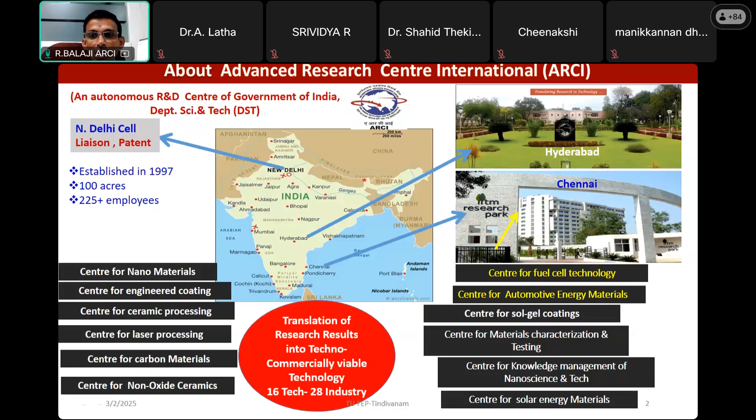So far we have transferred about 16 technologies to 28 industries in various aspects. Coming to our center, which was established in 2004, with a major focus on hydrogen fuel cells, that means hydrogen utilization aspects. Apart from that, we also concentrate on hydrogen generation R&D activities and storage.

Apart from three main activities, we also work on other energy storage devices like battery or supercapacitor, which are kind of spin-off technology, because most of the components used for fuel cell generation and storage aspects can also be used in making other energy storage devices like batteries or supercapacitors. We do concentrate on that particular area also.

Ultimately, we also have a kind of manpower generation program, hiring JRF and SRF for our R&D activities. A major advantage is that they can join with us with or without GATE category. Once they join with us, we will support them for 5 years with full stipend, and they have the liberty to register for a PhD at any of the NITs or IITs in India. We support them for 5 years as an external candidate, and at the end, they will have a PhD degree from the NIT or IIT where they registered, along with good exposure to high technological readiness level R&D activities. That is also one of the verticals we work on - generation of skilled manpower for this hydrogen energy society.

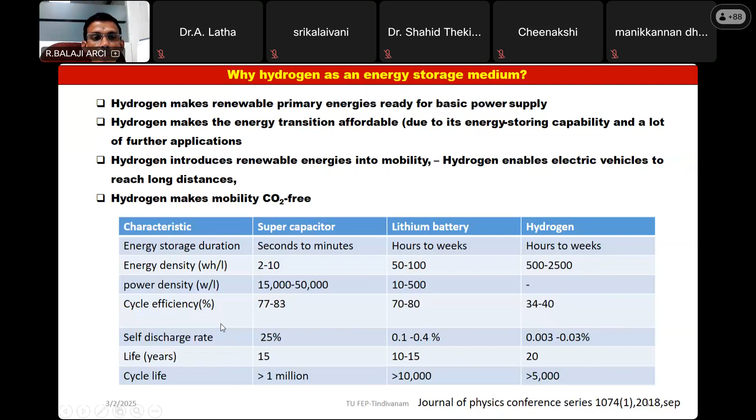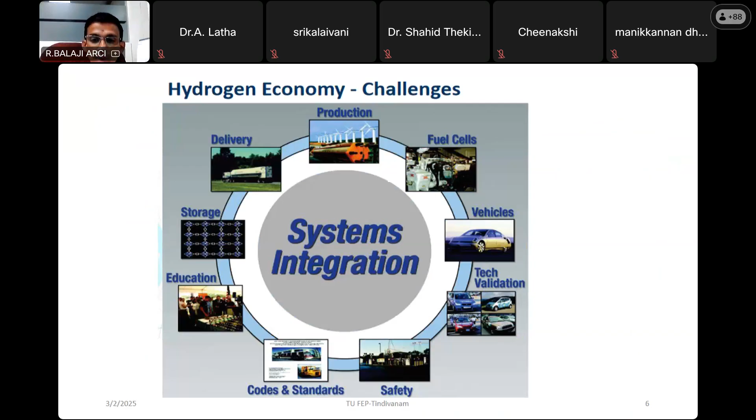When you talk about hydrogen, there are other key aspects I discussed: generation, storage, and transportation. Finally it comes to utilization. Apart from these four important steps, there are many intermediate steps we need to take care of, especially arriving at standards, safety, and codes, which are equally important because hydrogen is a highly explosive gas that needs proper codes and safety standards, unless otherwise it will not be practically viable. So the development of codes, safety, and standards is also equally important. And skill and education on energy technology is also equally important. These are the various verticals we need to take care of when using hydrogen energy based mobility or backup power applications, especially for smart cities.

As I said, the first step is generation, which is classified based on the amount of CO2 emitted from the feedstock while generating hydrogen. In that case, there is brown hydrogen, which has a huge CO2 emission per kg of hydrogen, coming around 18 to 20 kg of CO2 per kg of hydrogen.

In terms of gray hydrogen, it is slightly lower than brown hydrogen because the feedstock is natural gas, where we have a single carbon molecule. So the emission of CO2 is controlled and lower than brown hydrogen, lying between 10 to 12 kg per kg of hydrogen.

The same hydrogen, if you have a proper mechanism for carbon capture and sequestration, is colored as blue hydrogen. And ultimately, if you generate hydrogen from water using renewable energy, it is green hydrogen, which has zero carbon footprint, with emission of CO2 almost zero while producing per kg of hydrogen. This is the major classification of hydrogen generation, without which we can't go for any application of hydrogen.

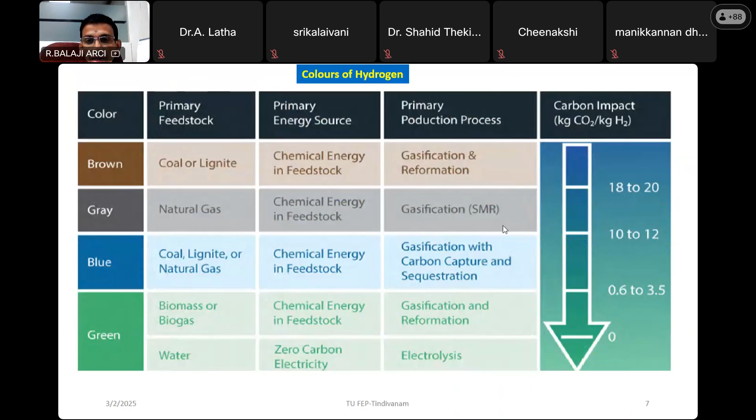As I said, when you generate hydrogen from hydrocarbon, we will end up with carbon monoxide and carbon dioxide, and we need a proper carbon capture mechanism. Unless otherwise, the real advantage of hydrogen energy may not be appreciable. But if you get hydrogen from water as the source, you end up with hydrogen and oxygen, which are environmentally harmless. So you can get pure hydrogen through water using renewable energy.

Here, you cannot consider grid power for electrolysis or any purpose; you have to consider renewable energy power. Using renewable energy power, you can split the water molecule and get hydrogen. This is a well established process called electrolysis, which is well established and demonstrated.

Whereas in the case of thermolysis, it is nothing but getting heat from renewable energy, and using that heat, water is directly split into hydrogen and oxygen. The disadvantage here is that during the thermolysis process, the possible recombination of hydrogen and oxygen which is produced is more likely. So the chances of recombination are more, and that technology is not highly mature.

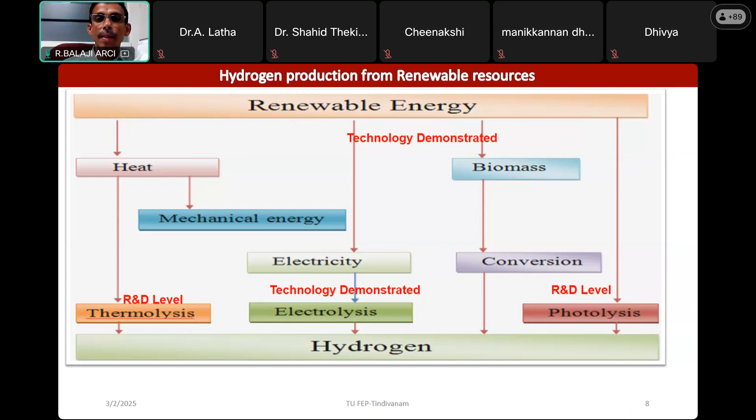In this electrolysis process, when you use water as the source for hydrogen, you have to give electrical energy. Theoretically, we require about 35 units of electricity to produce 1 kg of hydrogen. But practically, because of material limitations, cell resistance and component resistance, the energy requirement per kg of hydrogen production is almost double - close to 50 to 60 units of electricity per kg of hydrogen.

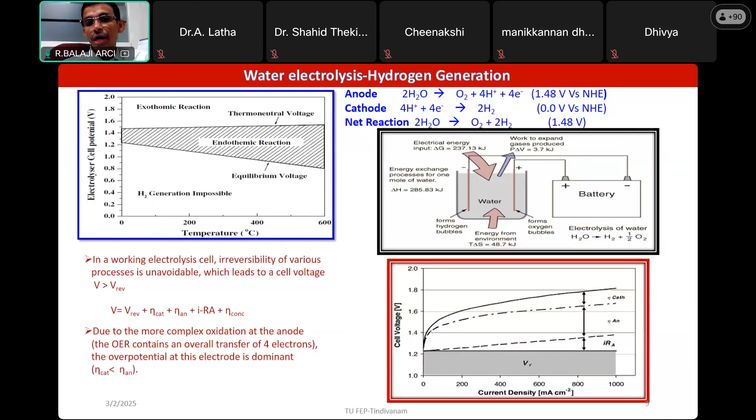A lot of this hydrogen cost is determined based on the energy input given for its production. In the case of natural gas, we need to supply thermal energy, which is much cheaper than electrical energy. Obviously, the cost of hydrogen comes down to $2.5 to $3.2 per kg. Whereas if you use nuclear energy - high thermal energy - and directly use that thermal energy to split the water molecule into hydrogen and oxygen, we end up with low cost energy because both are thermal energy, without carbon as the feedstock.

Whereas in the case of electrolysis process, as I said, because it is a highly energy intensive process to generate hydrogen from water, it lies about 4.4 to $7.4. So any method adopted for generation of hydrogen is ultimately categorized and employed based on the cost of hydrogen production. So the cost of hydrogen is a major bottleneck for easy implementation of hydrogen energy based mobility or backup power application.

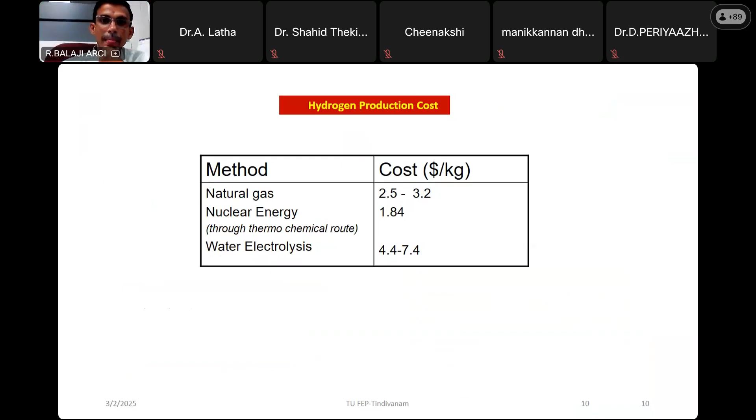Apart from hydrogen generation, another step is storage, which is also equally important because it has low molecular weight, low density, and occupies more space. You have to compress the hydrogen in a particular manner so that the gravimetric and volumetric energy density can be increased. And the kinetics - because when you want to compress hydrogen, you have to apply some energy - so the kinetics, heat transfer and efficiency all need to be considered when you try to use hydrogen as a storage medium.

There are three forms in which we can store hydrogen: compressed gas, liquid gas, and condensed state, which is solid form. Among these three ways of storing hydrogen, compressed gas is economically viable, and we can store hydrogen at elevated pressure up to 700 bar.

Whereas in the case of liquefying hydrogen, it is a very energy intensive process, because the amount of energy required to liquefy the hydrogen is higher than the amount of energy you want to generate. So it is an energy intensive process. Liquefaction of hydrogen and storing it in liquid form is not an economically viable option, except for niche applications where space application is required. Wherever niche applications exist, storing hydrogen in liquid form is viable.

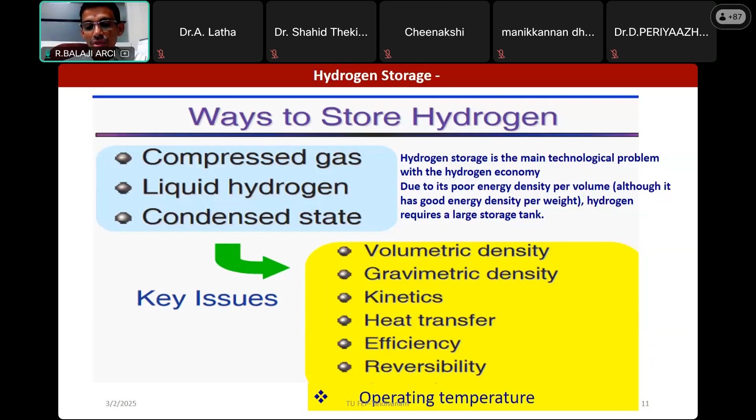In the case of solid form of storing hydrogen, you have hydrogen gas, and when you apply some pressure or temperature, you can store it in the form of metal hydride. There are some metals which have an affinity towards hydrogen and form a metal hydride when you give some energy input. But if you give the same energy, you can get back the hydrogen from the metal hydride. So this is a kind of condensed state of storing hydrogen in solid form. Among liquid, gas, and solid forms, the gaseous form is economically viable and is being widely adopted.

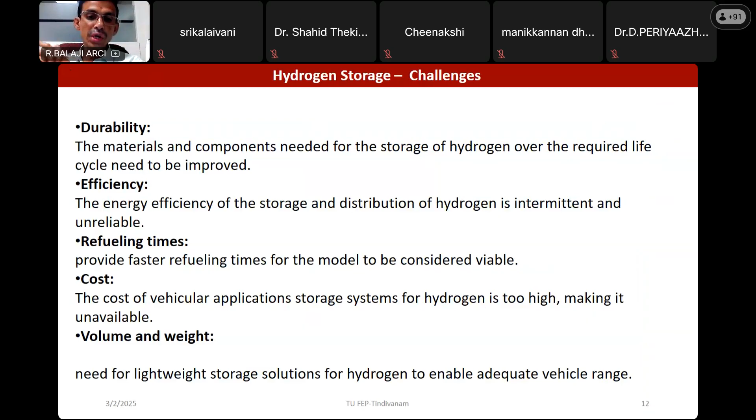In that case, carbon composite cylinders are much more appreciable - they can handle hydrogen at elevated pressure of more than 700 bar. Even at that pressure, there's no reaction between carbon-based material and hydrogen, and it's also much safer. The weight of the cylinder is also very low compared to steel cylinders. So volume and weight are equally important considerations for hydrogen storage.

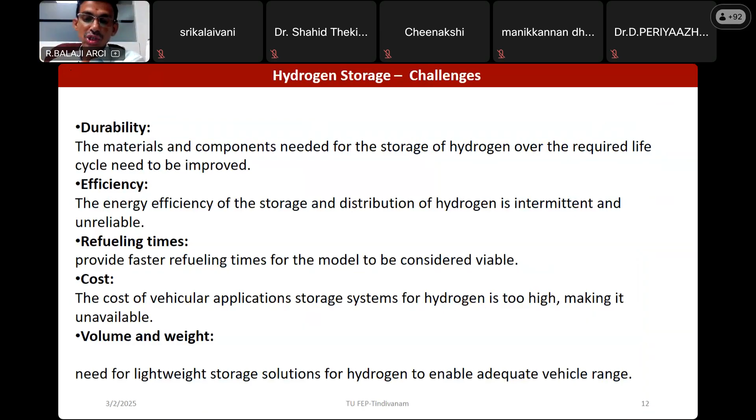So let us assume we address these two key steps - generating hydrogen at much cheaper cost, and having a mechanism to effectively store hydrogen. Ultimately, the final aim of this hydrogen is to deliver power. There are various conversion devices to convert hydrogen into power.

Why go with the fuel cell route? Because the efficiency for conversion of hydrogen into power is higher compared with other energy conversion devices. You can use hydrogen in an IC engine to deliver power, but the efficiency is very low, close to 20 to 25%. Whereas using a fuel cell, the conversion efficiency of hydrogen to power is high. That's why the fuel cell is considered the ultimate option to convert hydrogen into power.

But when handling hydrogen and air or oxygen as the oxidant, safety is one of the key parameters, and reliability is another. This fuel cell based system is reliable and durable, and can be deployed with minimal service requirements in a range of environments, whether backup power application or mobility application. It is much more reliable than any other conversion device.

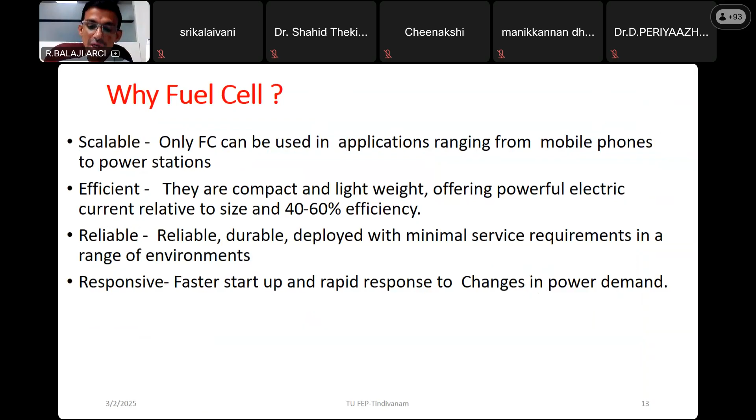So the fuel cell is basically an electrochemical device. When you talk about any electrochemical device like a battery, you must have a positive and negative electrode, and you must have an electrolyte to carry the ionic conduction between these two electrodes.

Depending upon the type of electrolyte employed, fuel cells are categorized into 5 major patterns. One is proton exchange membrane, where the proton is the ion exchange medium, and it conducts the hydrogen oxidation and oxygen reduction reaction. Another is solid oxide, where oxide conduction is predominant, and this takes place only at high temperature. That's why it is used only for stationary application, not for mobility application.

The molten carbonate and phosphoric acid fuel cells are a kind of alkaline or acidic based environment, and they are used for certain applications.

Instead of hydrogen as fuel, you can use methanol as fuel. When you inject methanol as fuel in the system, it generates hydrogen instinctively and then delivers power. Because of this combination of generating hydrogen from methanol and then hydrogen to power, the overall power density and energy density for methanol fuel cell is low. So it is used only for consumer electronics application; other than that, it cannot be used for any application. Depending upon the type of electrolyte and operating temperature, fuel cells are classified into 4 or 5 different types.

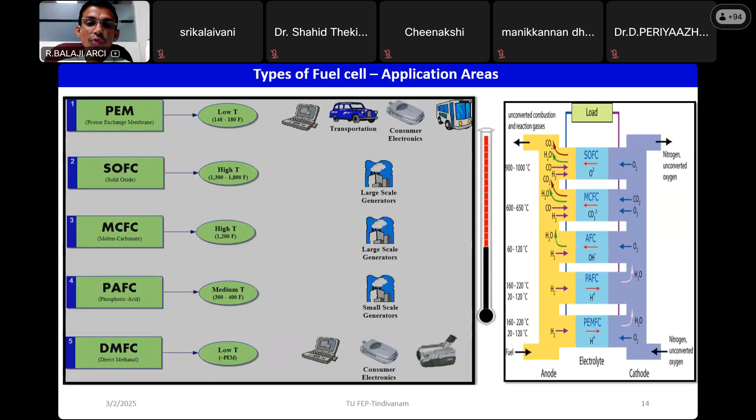Among these 5 types of fuel cells, why go with a PEM fuel cell? As I said, it's an electrochemical device. In any electrochemical system, the positive and negative electrode inter-electrode distance has to be as close as possible, which enhances the efficiency of the fuel cell. If you consider a polymer electrolyte membrane as the electrolyte as well as the gas separator, it has a dual job.

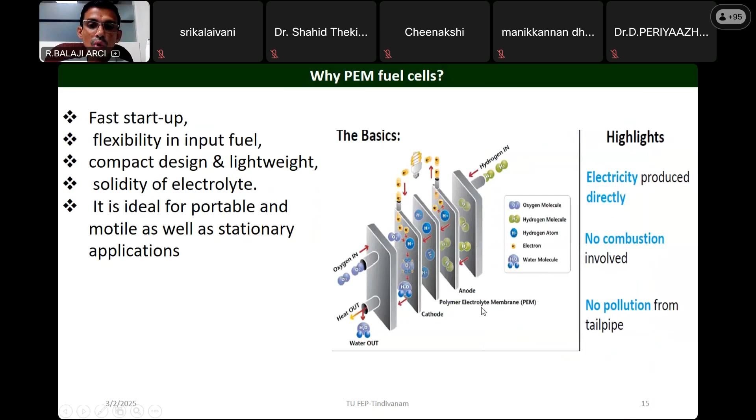It can act as electrolyte as well as separator. On each side of the membrane, you coat the electrocatalyst—one side acts as positive, one side acts as negative electrode. When you pass hydrogen and oxygen in the respective compartments, it generates electrons, which are used for power generation application. So this simple configuration of fuel cell is opening applications for a wide range of uses, whether stationary or transport application.

If you consider a battery, like a lead acid or lithium battery, the open circuit voltage is the voltage at no load conditions—each energy storage or energy conversion device has its own open circuit voltage. Similarly, the fuel cell also has an open circuit voltage close to 1 volt per cell.

Depending upon the operating voltage, the fuel cell efficiency is determined. In the case of PEM, it is operated at 0.6 to 0.7 volt per cell, giving an efficiency close to 55 to 60%. That means hydrogen is converted into about 50% electrical energy, with the remaining 50% as thermal energy, so the overall efficiency of the fuel cell is close to 80%. So if you develop a 1 kilowatt fuel cell system, it also produces 1 kilowatt of heat. But that heat is low grade heat, which cannot be used other than for room heating purposes.

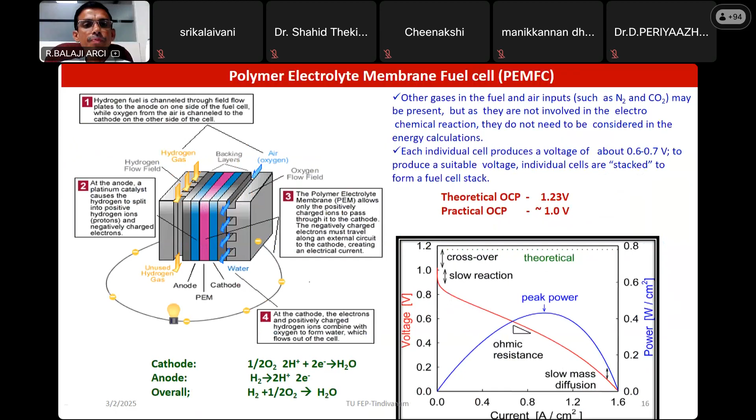These are the major important components for any fuel cell arrangement. One is the electrode substrate, where you need to coat the electrocatalyst, a platinum-based electrocatalyst, and the membrane, which takes care of the ionic conduction as well as separation of gases. Apart from that, you need to facilitate hydrogen and oxygen in the respective compartments. To facilitate this flow of oxygen and hydrogen, you need a proper flow channel pattern that takes care of equal distribution of gases on the catalyst surface, which ultimately delivers good power density for any fuel cell.

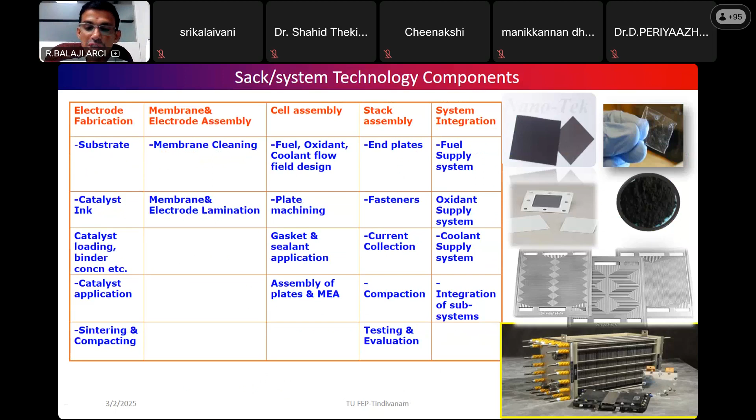When you want to use fuel cell for power generation, we ultimately end up with water as the byproduct. So apart from power, water is also one of the byproducts - pure water. So you have to effectively evacuate the water from the overall system. Otherwise, it will block the catalyst surface and it will not allow hydrogen or oxygen molecules to enter into the respective catalyst performance.

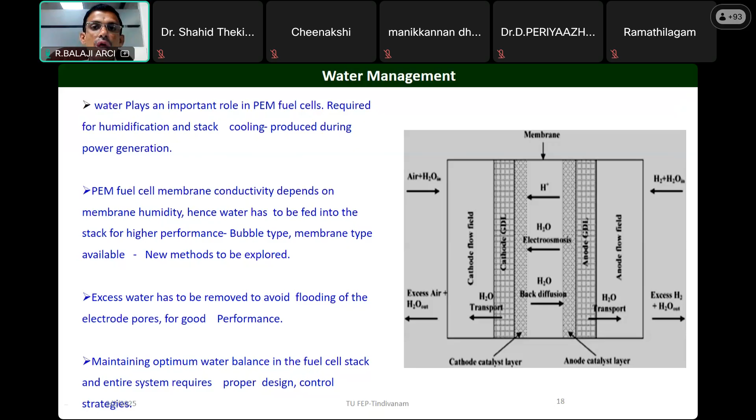So apart from water management, each fuel cell will also produce heat as a byproduct. So if they develop a 1 kilowatt system, 1 kilowatt heat and 1 kilowatt power will also be produced. So you have to have an effective thermal management system where the heat coming out from the fuel cell has to be cooled down, so you can operate the system always at a constant temperature of 50 to 60 degrees Celsius. So the generated heat can be used for room heating purposes.

Using some phase change materials - this concept is widely adopted in developed countries like Europe and US. They use low temperature fuel cells in two kinds of applications: one for power generation and another for heat management. So effective thermal management is also equally important to get maximum efficiency from the fuel cell.

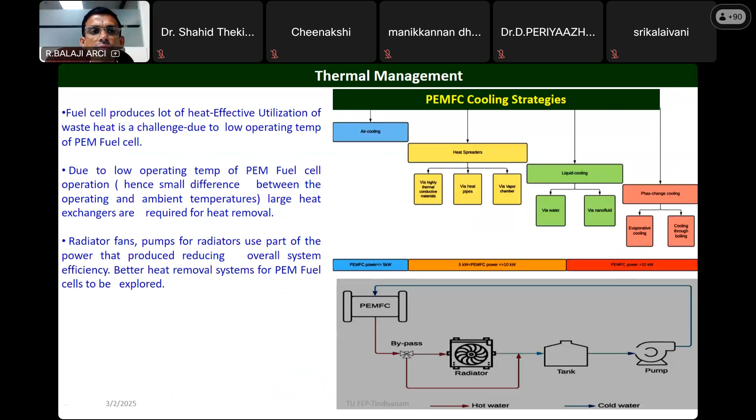As I said, there are various process phenomena taking place inside the fuel cell system. Because if you don't properly evacuate the water from the system, flooding will happen. Or if you don't properly supply fuel, fuel starvation will happen. And if fuel starvation happens, the positive electrode will become negative and the negative electrode will become positive. Because of this, over time, the catalysts coated on the membrane will lose their activity, and overall it loses the performance of the fuel cell.

So each parameter has to be considered: effective water management, effective thermal management, and effective fuel utilization. All these factors are important, like in other engines such as IC engines. For fuel cells too, these major phenomena need to be considered for effective operation.

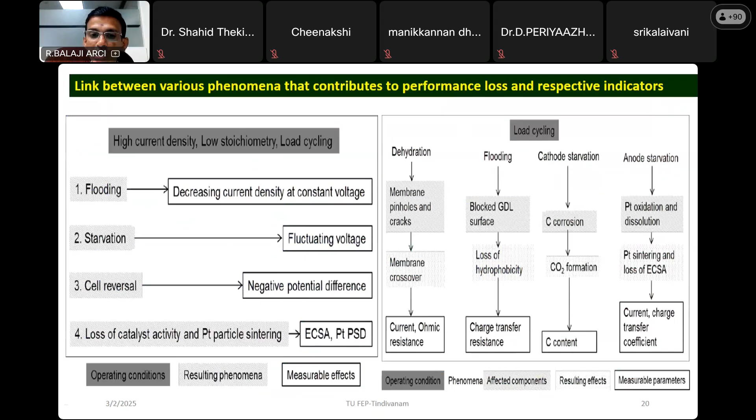Apart from the fuel cell - as I said, fuel cell is a final utilization aspect - if you want to develop a PEM fuel cell based power generation device, apart from the fuel cell stack, you need to have a proper fuel supply system, an air supply system, and power conditioning, because the fuel cell will produce DC power like a battery.

But though it is DC generation power, it is highly different from the battery. The battery will deliver low current and high voltage, whereas in the case of fuel cell, it is reverse: high current and low voltage. Even at 0.6 volt per cell, you can draw a maximum of 200 amps or 300 amps.

So the designing of the power conditioner is most critical. Whatever inverters or converters which are meant for the battery may not be suitable for the fuel cell, because the entire power electronics are entirely different - fuel cell operates at low voltage and high current, whereas the battery operates at low current and high voltage.

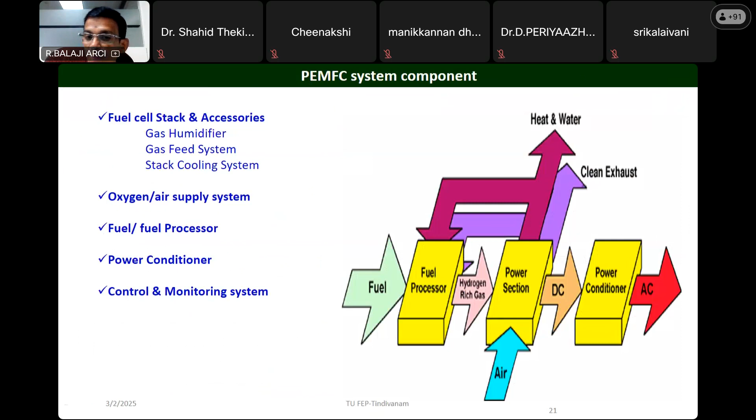Development of power conditioning in order to get AC as a power output is equally important. So apart from the chemical and chemical engineering aspect, a lot of power, electrical, mechanical and other interdisciplinary engineering teams are required when you want to build PEM fuel cell based power generation devices. And obviously if you want to deliver constant power and make the system sustainable, you must have effective control strategies and electronics.

In the case of fuel cell, you need to manage various phenomena: heat production, water generation, fuel consumption, air consumption, and the diffusion process. All these phenomena are controlled by current, not by voltage. So the control strategy should be a current driven process, not a voltage driven process.

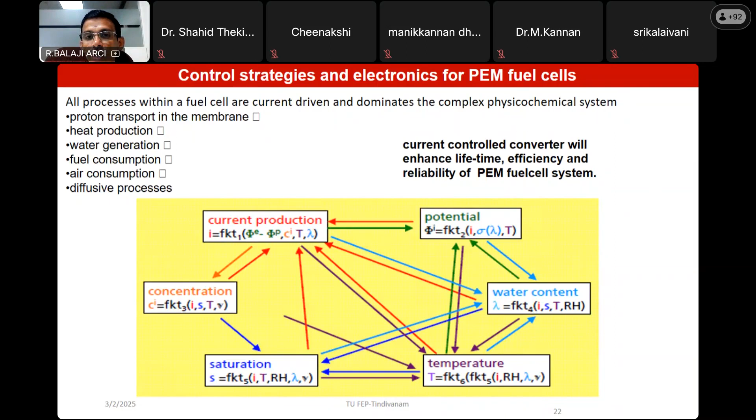Most control strategies and electronics are driven by voltage, whereas in the case of fuel cell, this control strategy and electronics has to be driven in a current controlled manner. That is the uniqueness compared with battery or other energy storage devices. Developing control strategies and electronics is entirely different from battery and supercapacitor.

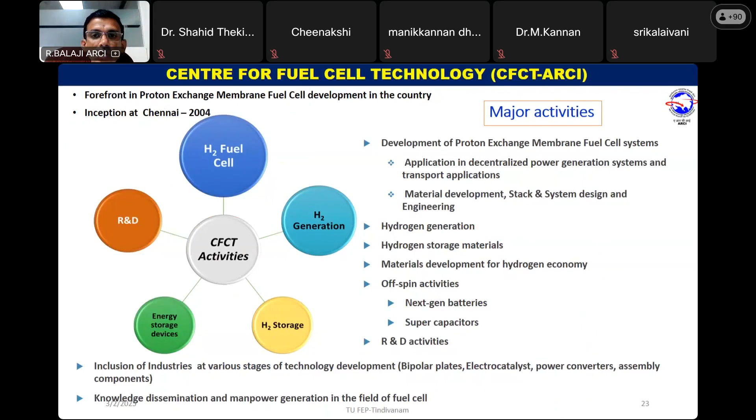With this basic R&D and basic understanding about the fuel cell system, the major activity at CFCT is hydrogen generation and the fuel cell. This is the pathway we normally adopt for making fuel cell based power generation applications.

We have a two pathway mechanism. One mechanism is that we will buy commercial materials, make our own components, and make our own components for the fuel cell.

Once the fuel cell stack is ready, we will also develop a balance of system like air supply system, fuel supply system, power conditioners, and thermal management system. We integrate these with the core fuel cell stack to make a system and a product. Once the product is there, wherever hydrogen is available, we do field trials and deliver power.

The second pathway is that we also work on developing our own materials. If it works at smaller scale, then we will scale it up to higher stack level. So this is a two-way mechanism.

One pathway is commercial material, where we make our own component and build the fuel cell as a system. The other pathway is developing our own material, and if it works fine at lower level, it can be upgraded to higher level. This is our pathway mechanism for technological development.

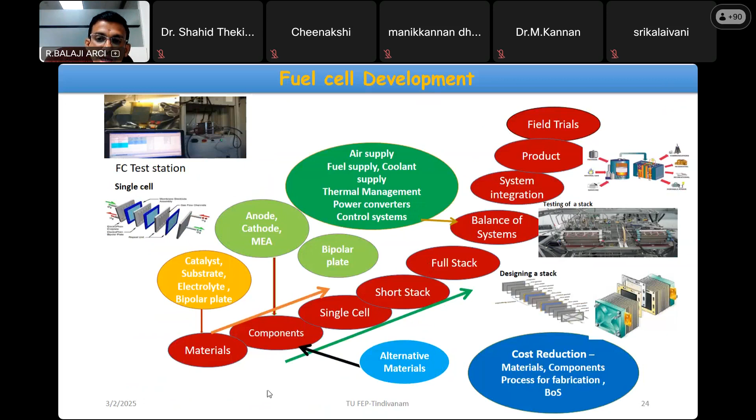Our institution, especially our center, has done enormous work in this area, and we have about two decades of experience in this sector, trained more than 100 manpower, and have very good patents with technology transferred to industry. We have conducted more than 10 field trials for stationary as well as mobility applications.

We have very good strength in making the core component for fuel cells, which is the membrane electrode assembly. Using the developed stack, we have tested extensively and delivered more than 200 kilowatts of power.

We have tested our fuel cell stack because when you want to introduce a new technology, ultimately the durability and endurance tests have to be carried out. So we have done a very extensive endurance test, more than 8,500 hours.

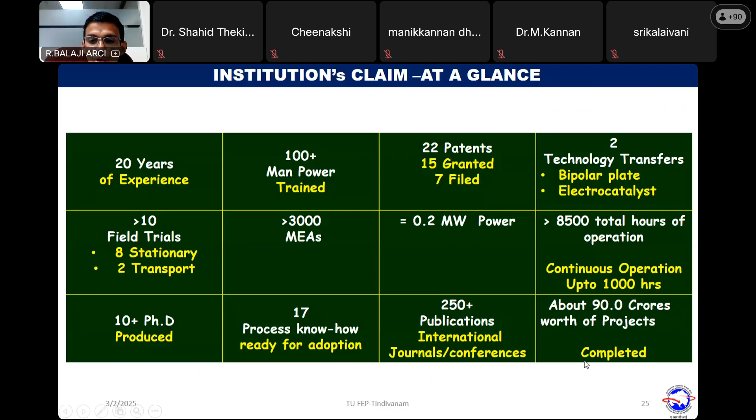We have also produced parallelly about 10 plus PhDs in this area through our centers, with very good publications, and handled about 90 crore worth of projects throughout these two decades of experience. These are our various developments ranging from 1 kilowatt to 20 kilowatt fuel cells over a period of 2 decades, demonstrated for various applications.

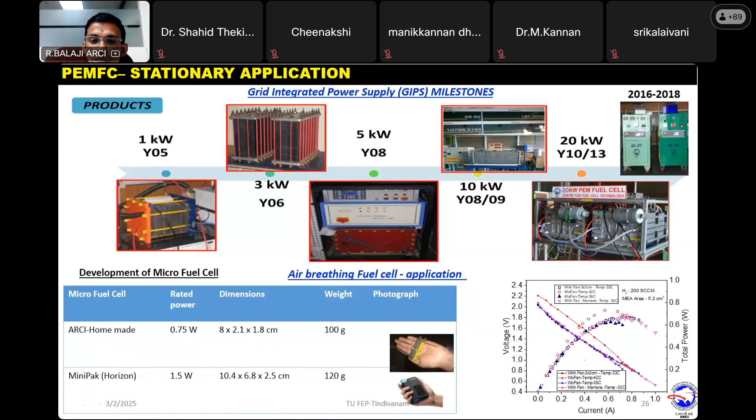We have done a demonstration with Neyveli Lignite Corporation, where they have hydrogen as a fuel, and Gas Authority of India Limited, where they also have a hydrogen source. Using that hydrogen source, they want to convert the hydrogen gas into power, which is kind of green electricity. We have also coupled with their own premises, and the entire premises was powered through hydrogen fuel cell.

Recently we also demonstrated with Bhabha Atomic Research Centre for green power generation. And recently we did a demonstration with the Tamil Nadu government as a kind of disaster management. For example, if you don't have a power supply in disaster conditions, if we have a hydrogen truck with commercial hydrogen cylinders, we can deliver power of about 5 to 10 kilowatts depending on the need. So it's a kind of hydrogen truck we demonstrated for disaster management with the Tamil Nadu government.

So these are the various field trials which we carried out using hydrogen powered stationary applications as a kind of backup power application.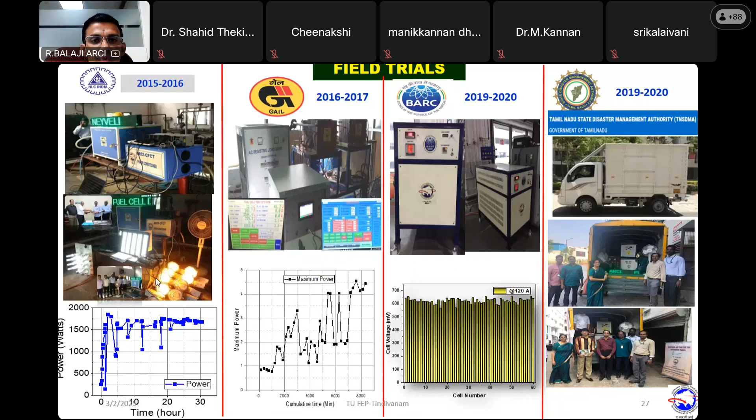Apart from stationary applications, we also carried out demonstrations for transport applications. Like EV electric vehicles, we can also use hydrogen powered two-wheelers and three-wheelers. We did a demonstration with a battery, because it's a kind of range extender. If you use a pure battery in the vehicle, it's basically an electric vehicle. But when you couple it with a fuel cell, the fuel cell will charge the battery on board.

If you have a metal hydride canister or hydrogen cylinder in the vehicle, using that hydrogen, the fuel cell will deliver DC power, and that DC power is utilized for charging the battery. So it's a kind of onboard charging of the battery, so it can be considered a hybrid two-wheeler along with battery.

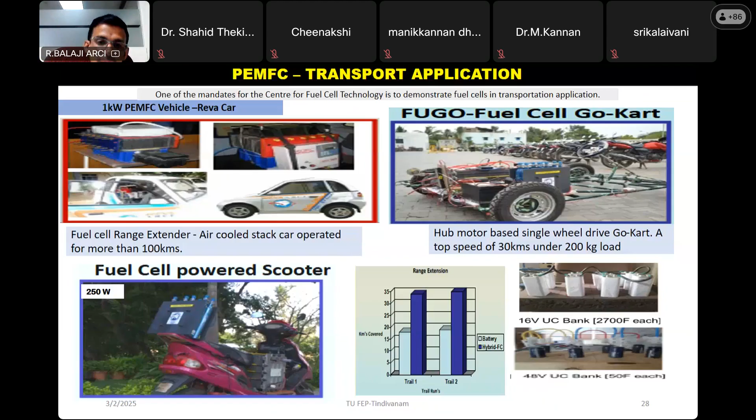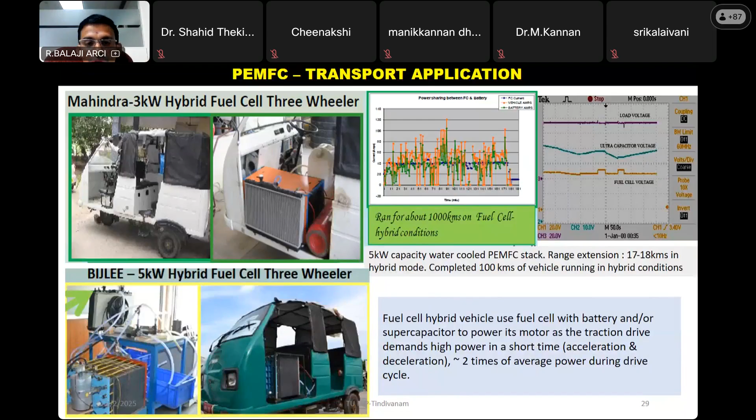Apart from the two-wheeler, we also did three-wheeler and four-wheeler applications, using various capacities of fuel cell, whether 3 kilowatt or 5 kilowatt, as a kind of hybrid fuel cell electric vehicle along with the battery.

As I said, you can directly use hydrogen as a fuel in the IC engine, but the challenge is that because it's a lighter gas, the air-fuel ratio mixing is more, so it occupies more of the combustion chamber, meaning the occupied engine capacity is more. It also occupies more volume in the combustion zone, and it emits NOx, because you're allowing hydrogen directly in the IC engine with oxygen as the oxidant. So normally it can end up with NOx emissions. And it has low efficiency, as I said earlier.

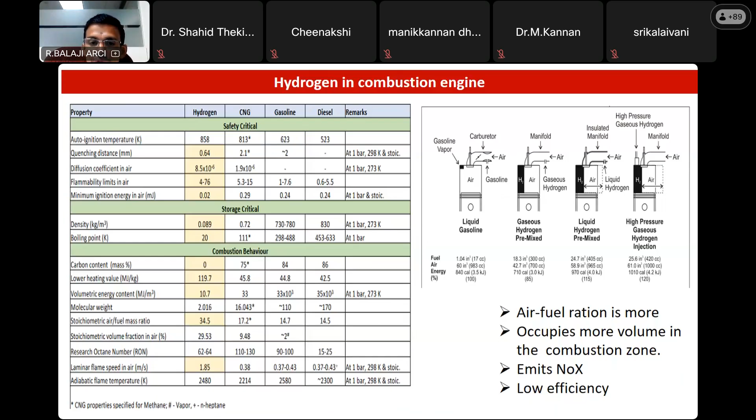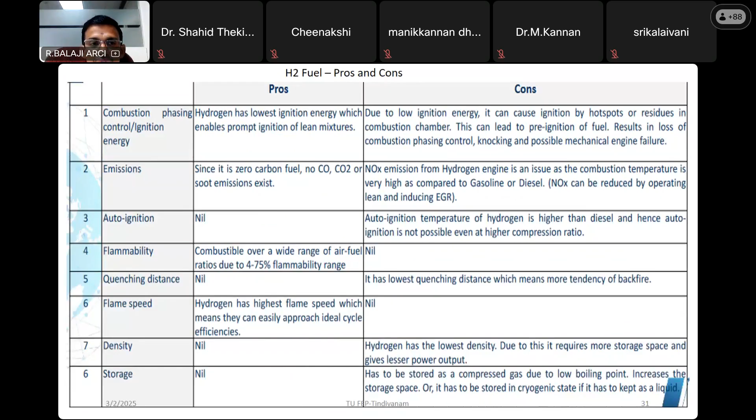Because of these disadvantages, the hydrogen IC engine is not taking off so far. There are positives and negatives when you use hydrogen as a fuel in an IC engine. As I said, NOx emission and efficiency are the major criteria - NOx is high, and efficiency is low.

Though it has these disadvantages when used in IC engines, recently Ashok Leyland has done extensive demonstrations and field trials using their own buses and heavy trucks, where hydrogen is powered in the IC engine. They demonstrated using type 4 carbon fiber composite cylinders, because you need to carry more hydrogen for this application. If you want to carry more hydrogen, you cannot use a steel based cylinder since it carries less hydrogen. So you have to use carbon composite cylinders, which can handle hydrogen in more volume and at high pressure, so the vehicle can be demonstrated using hydrogen powered IC engine, apart from the fuel cell.

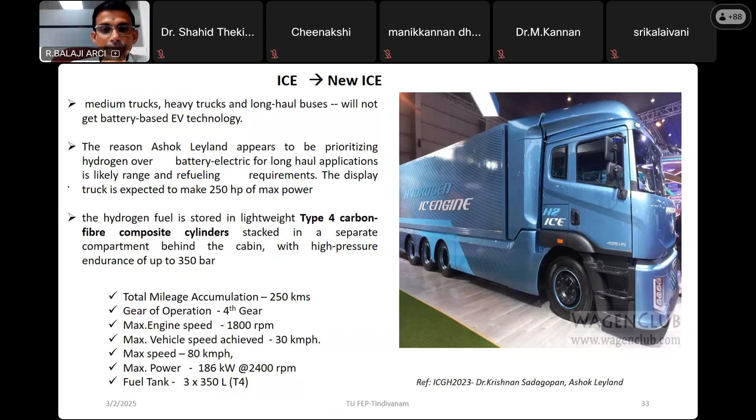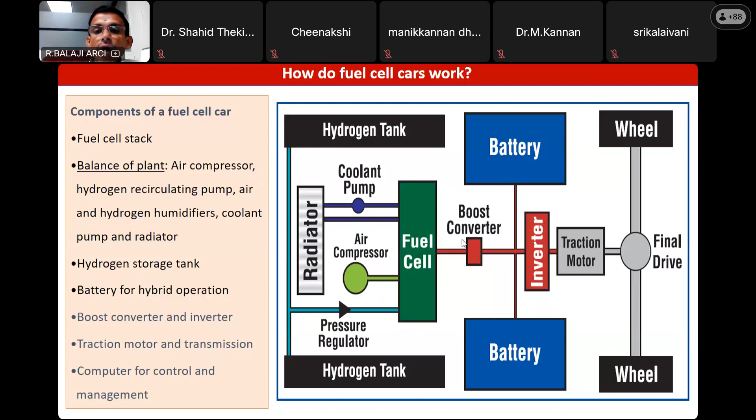But when you want to use hydrogen in a fuel cell car, there are two kinds of mechanisms. As I said, you need to have a battery even in a hydrogen fuel cell, because the BOP, balance of plant, has to be initially powered. For example, if you want to turn on the air blower or the control system, you must have a power source. So a battery with lower capacity is integrated with the fuel cell. These are the typical components required for making a hydrogen fuel cell work.

There are two ways of fuel cell hybrid vehicles: one is series hybrid, another is parallel hybrid.

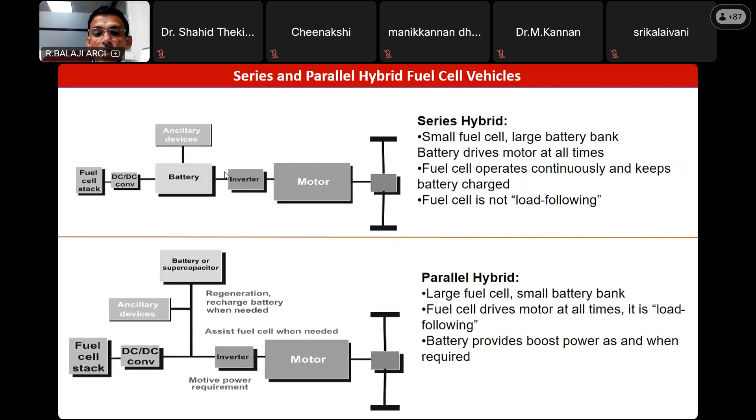In the case of series hybrid vehicle, the fuel cell capacity will be small and battery bank will be large. Whereas in the case of parallel hybrid, the larger will be the fuel cell capacity and small will be the battery bank, so that you can meet the required power demand for the motor, which takes care of the running activities of the vehicle.

The fuel cell vehicle has four important requirements. One is it should meet the peak power demand immediately, meaning the transient response time should be within 1 second. It should also cover the range - for example, if you want to cover more than 350 to 400 kilometers, you need to carry 5 to 6 kg of hydrogen, so you need a very good storage mechanism in the vehicle to cover the entire range.

The response time has to be high, and it should be capable of turning on the fuel cell and powering the motor even at low temperature. So the operational range, the temperature window, has to be from minus 20 to plus 50 or 60 degrees Celsius. These are the major requirements for fuel cell electric vehicles.

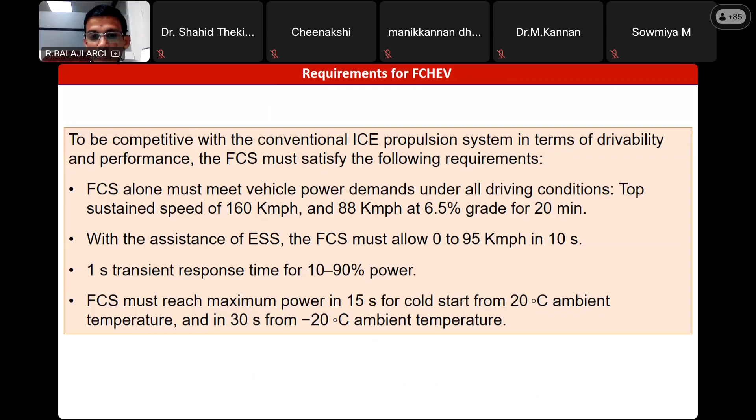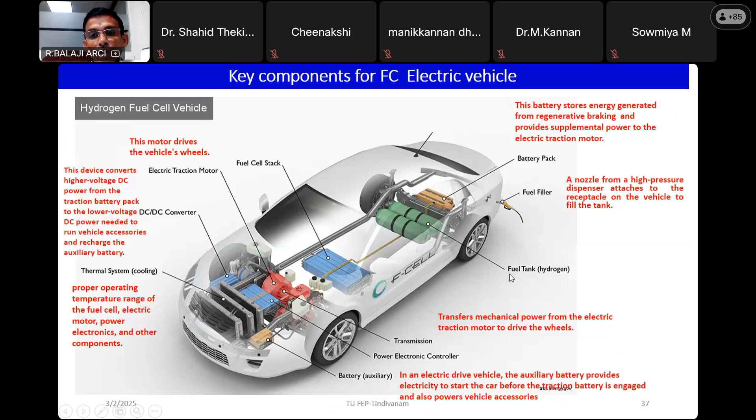This is a key component for fuel cell electric vehicle. You must have a fuel tank with a carbon composite cylinder that can carry more hydrogen, and a fuel cell like an IC engine that will convert the hydrogen into power. Other DC converters, inverters, power electronic controller, auxiliary battery, fuel filler, battery bank, and fuel tank are essential - these are the major key components for any fuel cell electric vehicle.

Apart from transport applications, this fuel cell is being widely used as a backup power application, especially in the telecom sector, where they may require 3 to 5 kilowatt power when the grid power fails. It is mandatory - most telephone tower operators must have backup power.

They are using diesel engines as power backup, but government guidelines are insisting they move away from fossil fuel based power backup applications, so they need to go with advanced hydrogen energy based power backup application.

So they have hydrogen storage cylinders at the station, and through the fuel cell, hydrogen delivers 3 to 5 kilowatt power that can meet the demand required for the telecom tower. So the telecom tower is one of the key application areas for fuel cell - it's a kind of backup power application.

Even in India, apart from developed countries, there are Reliance and Aditya groups operating many telephone towers which are being powered by fuel cell, not by diesel.

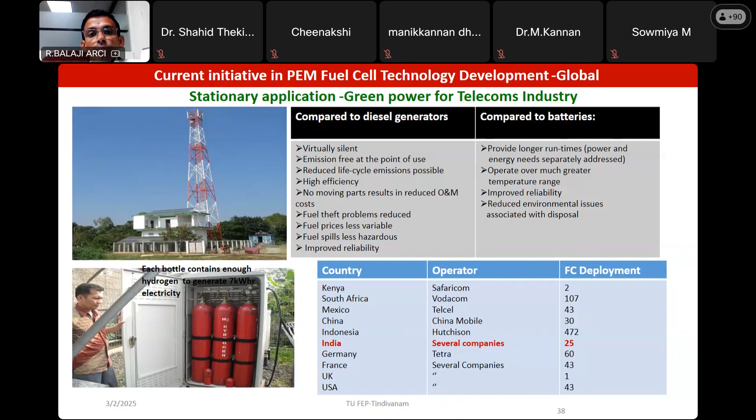Apart from transport applications, in the global sector all the leading automobile manufacturers like Hyundai, Toyota and Honda have experienced completely fuel cell powered passenger vehicles. I also experienced the same when I was in Vancouver.

This vehicle is being powered only through fuel cell. They have 700 bar storage cylinders on board carrying 4 to 5 kg of hydrogen, and using that hydrogen they have a very good control mechanism for controlling power. Each vehicle's fuel cell capacity is about 110 to 120 kilowatt - you can see the fuel cell is very compact and can serve the need of 110 to 120 kilowatt power while on board.

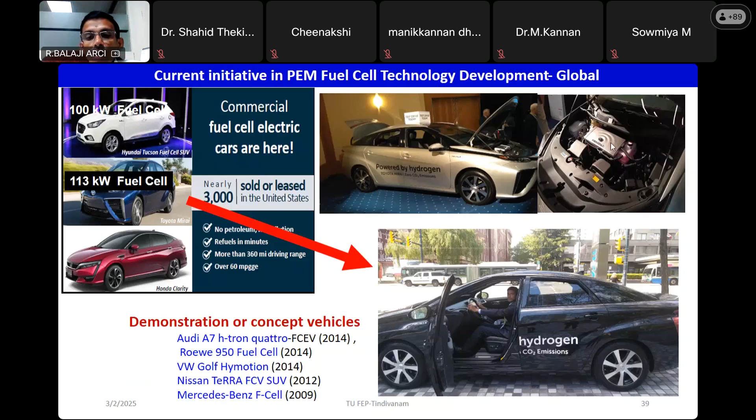Apart from passenger applications, there are other demonstration programs - hydrogen fuel cell powered train is also being demonstrated in China and Germany. Even in India, we will soon hear of a hydrogen fuel cell powered train.

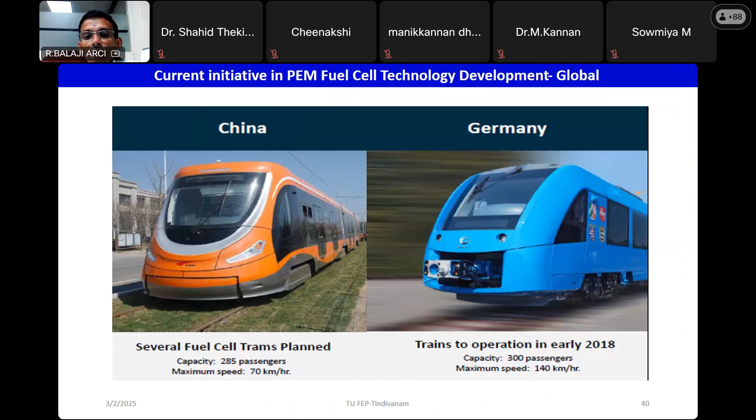These initiatives show that hydrogen can be an alternative fuel for any stationary as well as mobility application, which will help in reducing the carbon footprint, and which is needed for any smart city or smart energy generation.

As I said, when you compare fuel cell electric vehicle and battery electric vehicle, there are three important characteristics: price, range, and time to refuel.

So in these categories, if you see this hydrogen fuel cell electric vehicle, right now the cost is high because of the low volume of usage. Over a period of time, this cost will come down as the number of usage increases. So price is not really an issue for hydrogen fuel cell electric vehicles, and the range is also on par with fossil fuel.

You can cover 350 to 400 kilometers range. Unlike battery-based vehicles, where you need proper charging infrastructure and the time to recharge is high, varying from 1 hour to 12 hours, hydrogen-powered fuel cell vehicles have refueling time on par with currently existing petrol, diesel or CNG-based vehicles. So the refueling time is very less - it's 3 to 4 minutes.

So in that category, over a period of time, this hydrogen fuel cell electric vehicle will take over from battery-based electric vehicles.

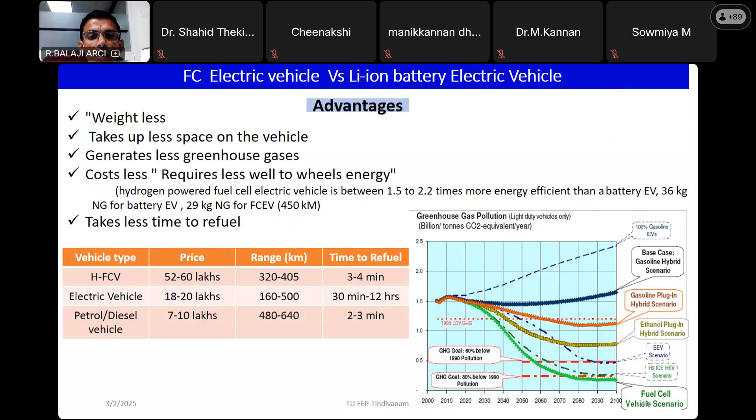As I said, this kind of net energy analysis is one of the parameters people consider when comparing battery-based electric vehicles with fuel cell-based electric vehicles. There are two parameters: one is energy stored on investment, and the second is efficiency. The energy stored on investment is the ratio between how much energy you spend to make 1 kilowatt of battery or 1 kilowatt of fuel cell, and using that 1 kilowatt, how much power you generate over a period of time. That defines the energy stored on investment.

So in that category, you take renewable energy and split the water molecule into hydrogen and oxygen, store it. Whenever required, you use it in a fuel cell to get back power and water. It's similar to a battery charging and discharging mechanism. That's why RHFC, regenerative hydrogen fuel cell, functions are similar to battery charge and discharge mechanisms.

But the amount of energy you need to spend to make 1 kilowatt of battery is more than the energy needed to make 1 kilowatt of fuel cell and electrolyzer. Because of that, the energy stored on investment for the fuel cell based electric vehicle is close to 60, that is 59, whereas for lithium battery it is only 35.

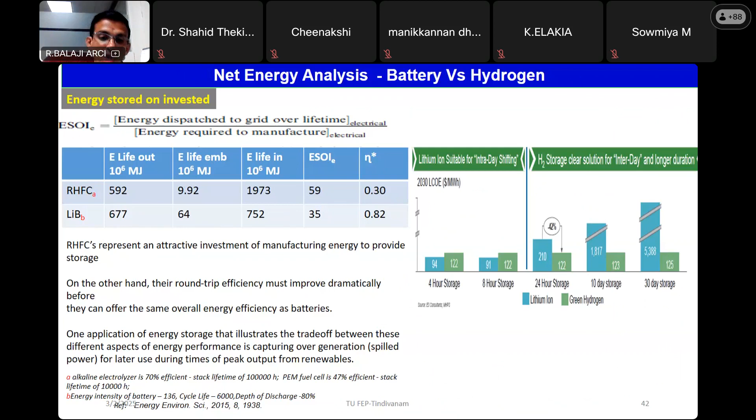The second advantage is it's completely green, with no carbon footprint. So in that aspect, the hydrogen-based fuel cell electric vehicle will be the future when compared with battery-based electric vehicles.

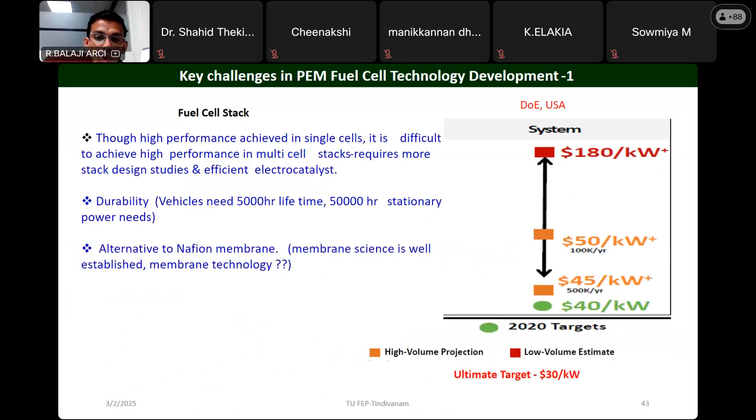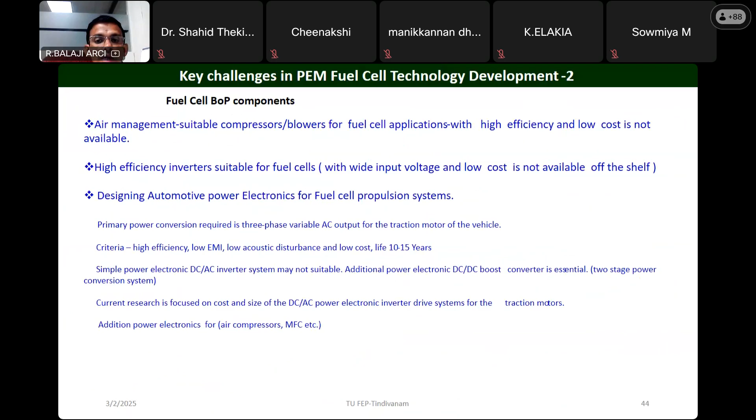So there are some key challenges. One is the cost - right now it is high because of the low volume of usage. The second aspect is the required balance of plant components, because apart from the fuel cell, you need other balance of system components: fuel supply system, air supply system, power conditioning system, and thermal management system. All are equally important. So we need to focus on developing our own balance of system for the fuel cell, so that the entire system cost can come down. And as I said, though you generate fuel in an effective manner, you need to have a proper fuel infrastructure.

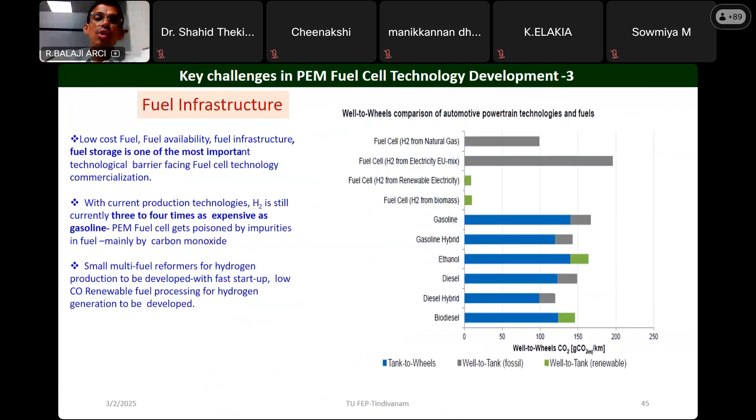Now we can find a fuel cell electric vehicle on the road, but where will you charge the fuel cell? You need to have a proper hydrogen gas dispensing system like our CNG or petrol pump. So the fuel infrastructure is one of the key challenges when you want to adopt fuel cell based vehicles.

Ultimately, if you want to introduce new technology for the commercial market, there is a difference between the price and the cost. The margin has to be less, so that the overall cost of the fuel cell based electric vehicle will come down. Once the technology penetration happens, this difference between price and cost can be easily understood.

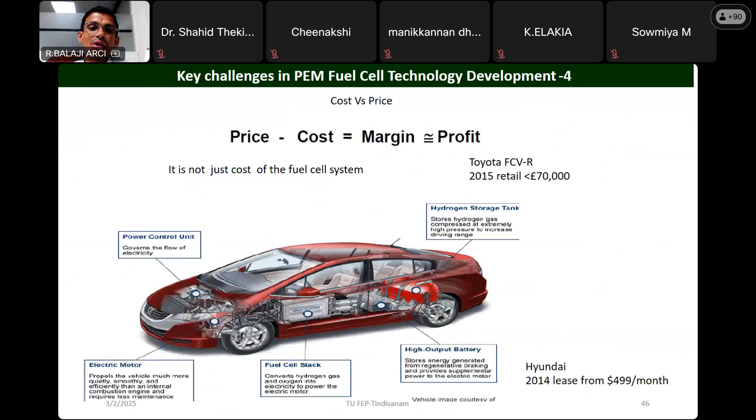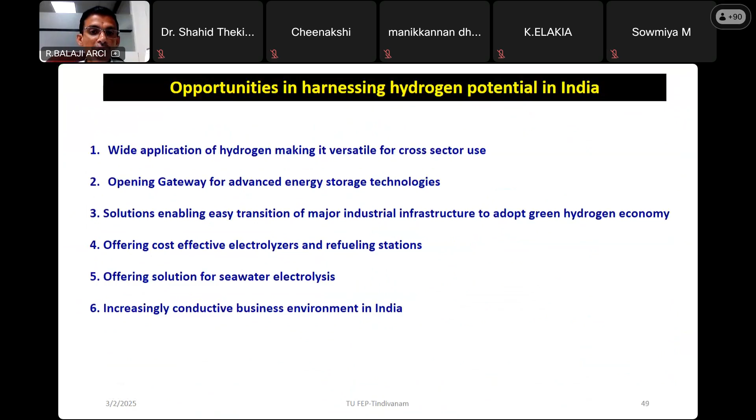So these are the major challenges which we need to overcome to realize a hydrogen-based economy. In that sense, artificial intelligence for hydrogen-enabled integrated systems is playing an important, critical role, because in this hydrogen-based integrated energy system, you are getting power from renewables, which are highly variable.

So you need to predict, based on the geographical location, the amount of energy coming from renewables, and using that renewable energy, how much hydrogen you can produce, and using that hydrogen, how much can be applied for mobility or backup applications. So all those things can be predicted.

Especially these advanced data analysis approaches can be used to enhance operational efficiency and sustainability, which help improve system performance and the economical benefit of the hydrogen integrated energy system. Artificial intelligence, and especially machine learning, is well suited for handling these non-deterministic and continuous challenges of the hydrogen enabled integrated energy system.

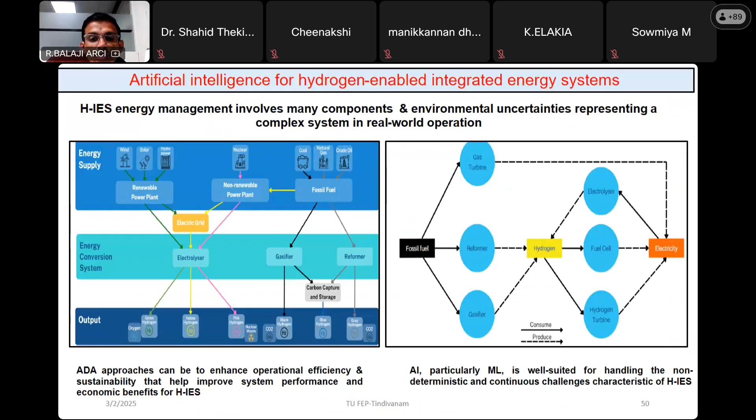AI and ML are also important to predict various malfunctions of this energy system in case of hydrogen, whether it comes from fossil fuel or from water. Irrespective of the feedstock, these predictions can be done using ML, which is also the need of the hour because it's a new technology for the commercial market. It would definitely help in predicting these aspects so we can get a clear picture of what would be needed for society.

Apart from this theoretical background analysis, we also require some kind of startups. This is a major area where startups can focus on development of not only the core component but other balance of system components, and especially hydrogen generation methods with low cost. These are some thrust areas where startups can focus on hydrogen fuel cell based electric vehicles.

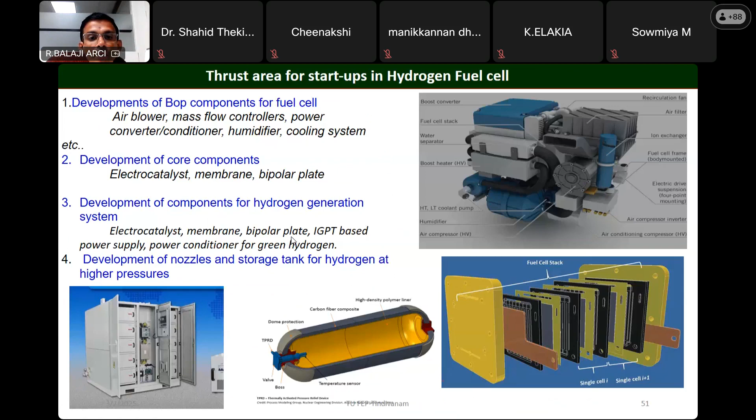To realize this, apart from all these technological challenges, awareness among people has to be created. Because the atomic weight of hydrogen is 1.008, which represents 8th October, every year 8th October is celebrated as Hydrogen Fuel Cell Day. We have also been celebrating Hydrogen Fuel Cell Day for the past 7 years by conducting various workshops and conferences, so that technology knowledge can be spread among society.

So hydrogen can be an alternative fuel, and it can be used for backup power or mobility applications, especially for smart cities. But I would like to conclude that though hydrogen is a green energy, there may be a possibility for carbon emissions. Right now the emission of carbon is more, but in future hydrogen will be dominant with less carbon footprint. That's what I want to conclude.